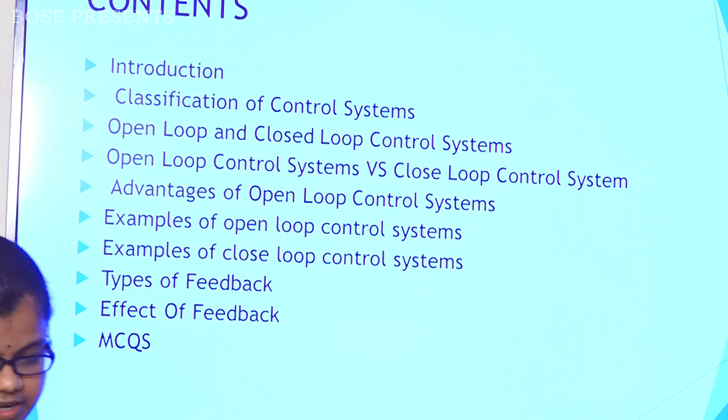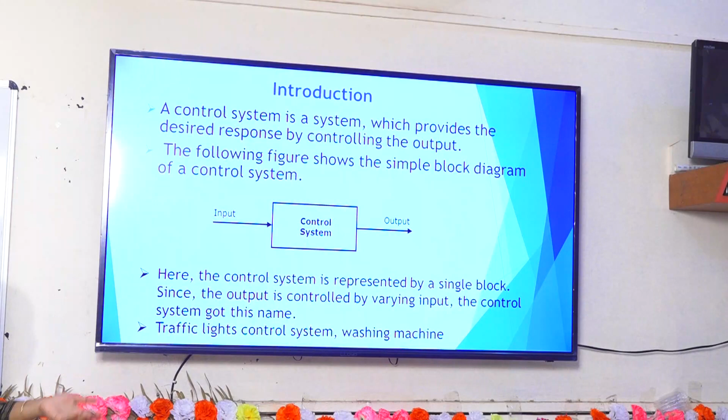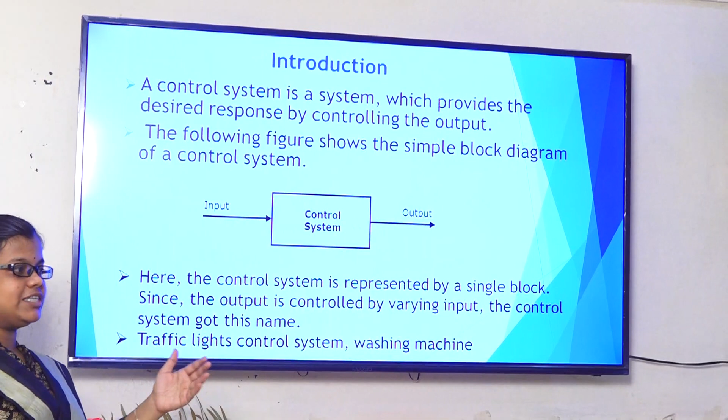This is my slide, and I will discuss what is a control system. The control system is a system in which we can get the desired output by controlling the output, that means what output we need. In a normal system we get normal output, but in a control system we get the desired response by controlling the output.

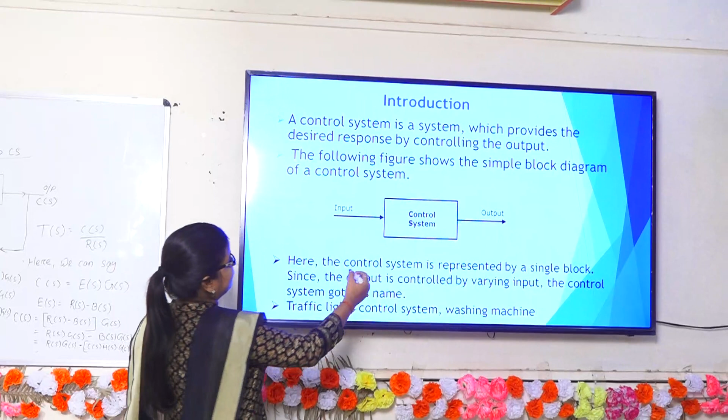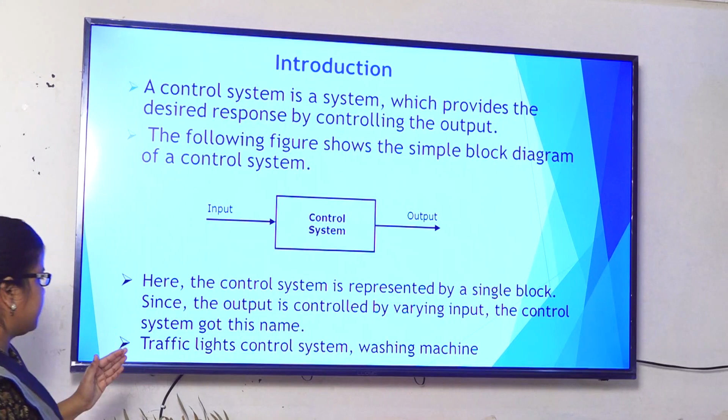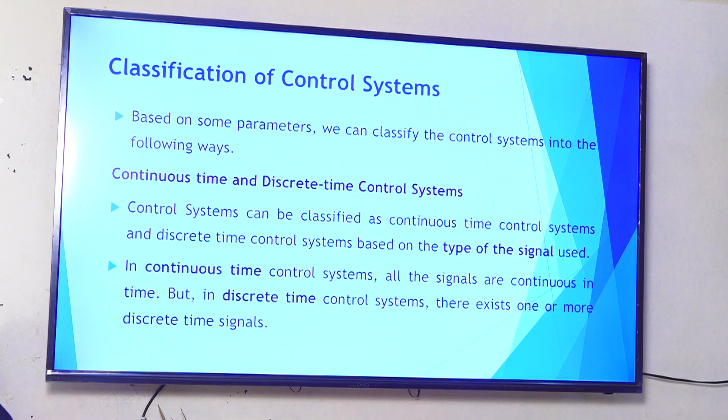This is the basic block diagram of control system, in which we can give input and get desired output. Here the control system is represented by a single block, in which we give input and get output. One of the best examples of control system is the traffic light control system and washing machine, and lots of examples are there. Then I want to say the classification of control system.

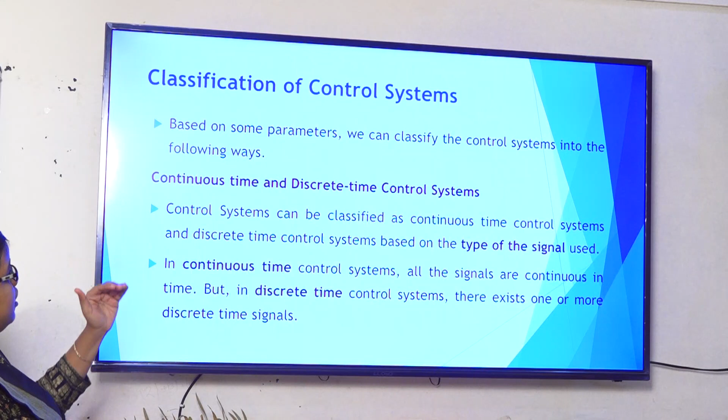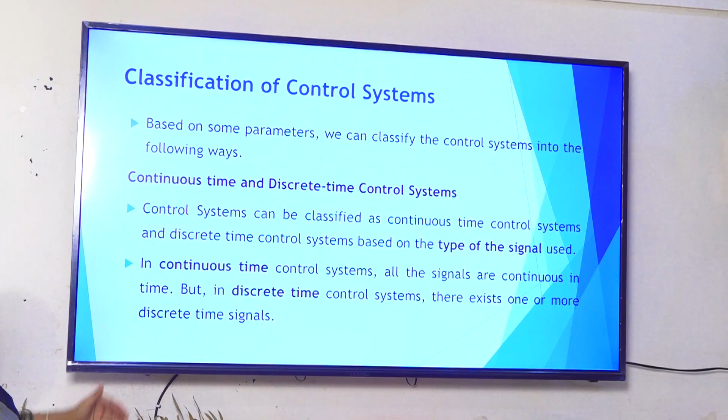Control system is classified in different ways. First of all, based on the signal, control system is of two types: continuous time and discrete time. As the name suggests, in continuous time control system, the signal is continuous with time. That means this is a continuous signal.

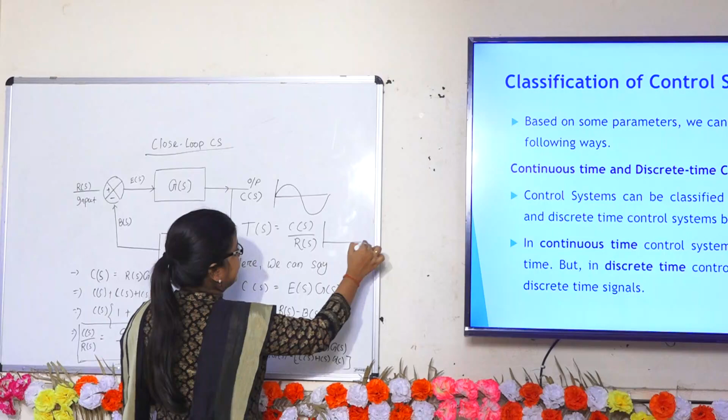But in discrete time control system, there exists one or more discrete time signals. We can say discrete time signal means this one, in which amplitude is not continuous.

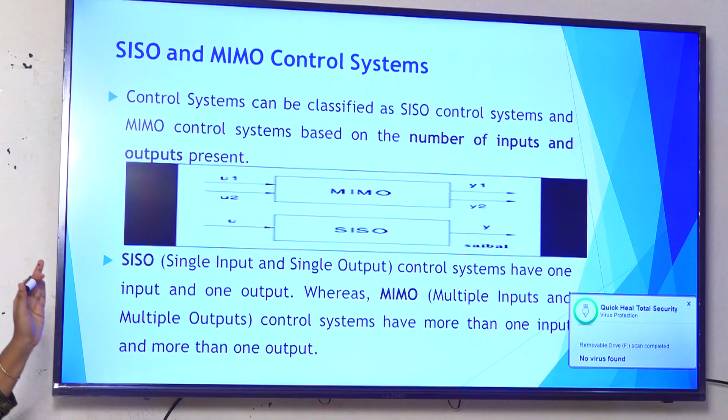Then according to number of input and output, control system is of two types: SISO and MIMO. SISO means single input single output. MIMO means multi input multi output. Here you can see this is a MIMO system, where number of input means two inputs are there, and here two outputs are there. But in SISO, that is single input and single output, here single input and single output.

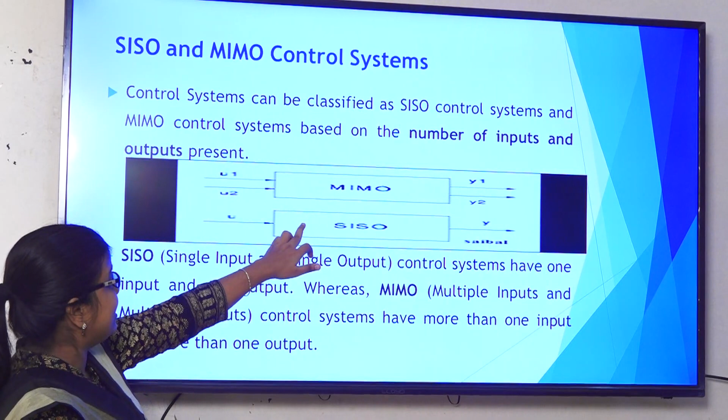But my main topic, I want to concentrate on open loop and closed loop control system. Open loop and closed loop control system are defined by the feedback path. In open loop control system, output is not fed back to the input, so the control action is independent of the desired output.

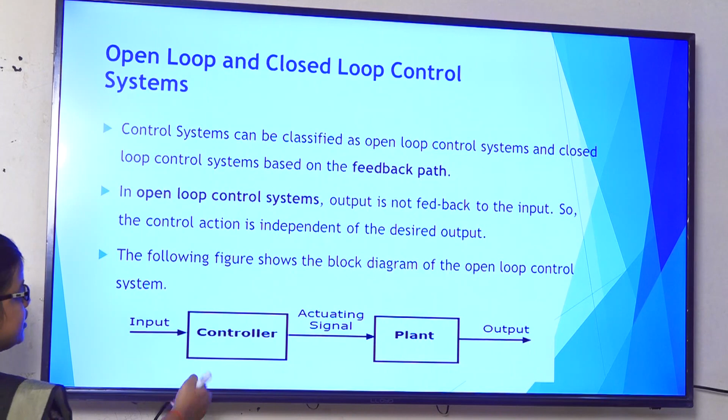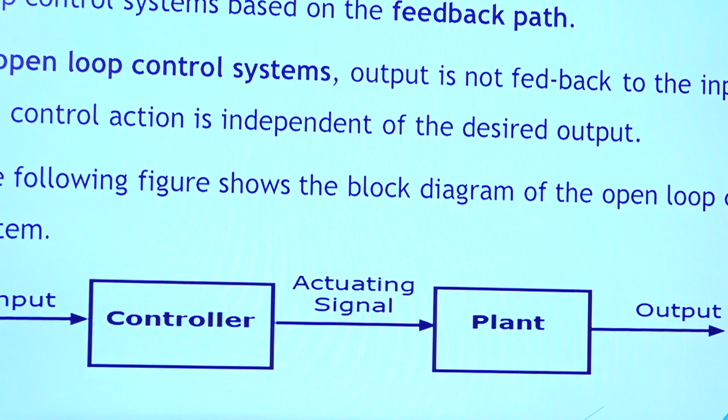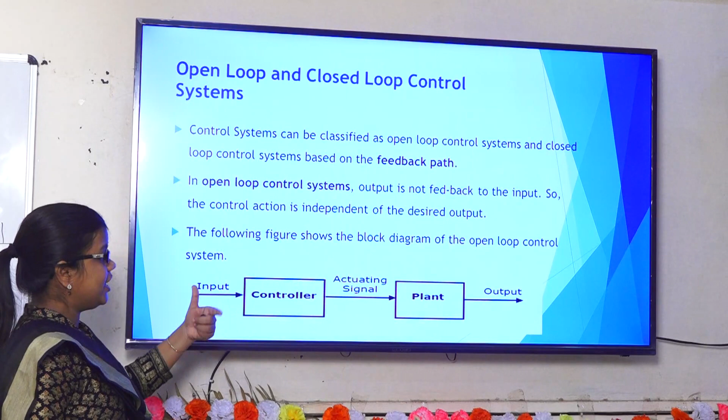The following figure shows the block diagram of open loop control system. Here this is a controller and this is a plant. I can give an example, that is electric fan. In electric fan, this is an open loop control system, because the controller, that means regulator, when we give input once, then we get desired output according to time.

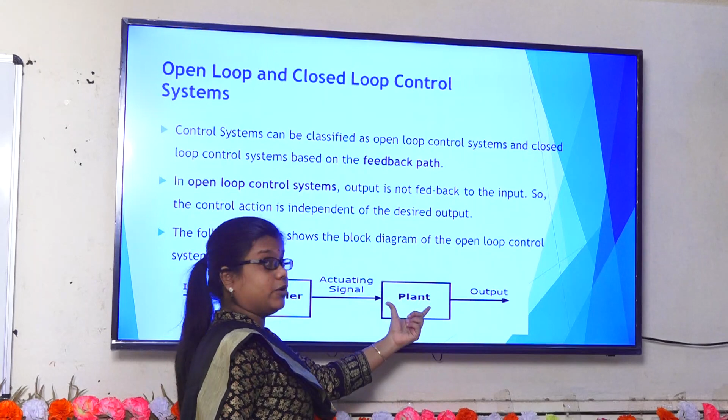In this case, regulator is used as controller, and the motor of the fan is used as the process plant. According to the regulator, we get the desired output throughout the process. So in this case, control action is independent of the desired output. What we give as input, we get output accordingly.

Then closed loop control system. This is one of the most important parts in control system. We can say that by using a closed loop control system, the system becomes an intelligent system or automatic system.

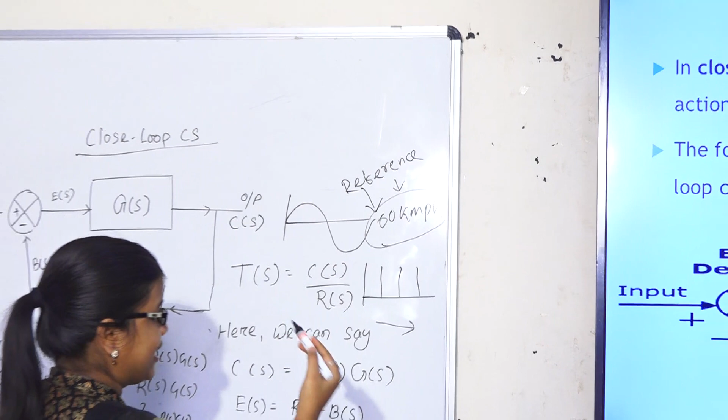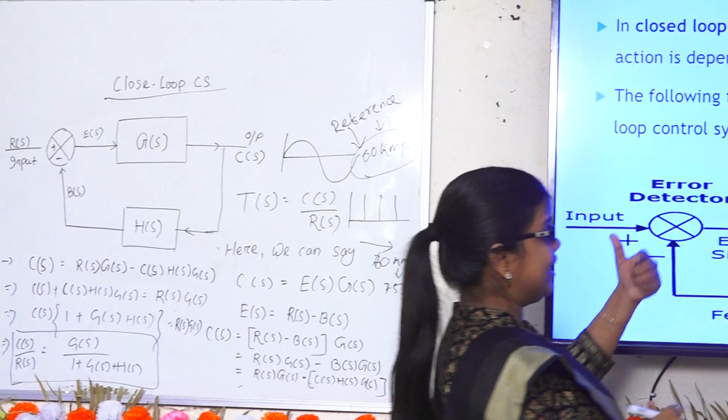Deaccelerate the bike. Then we get the desired output, that is 60 km.

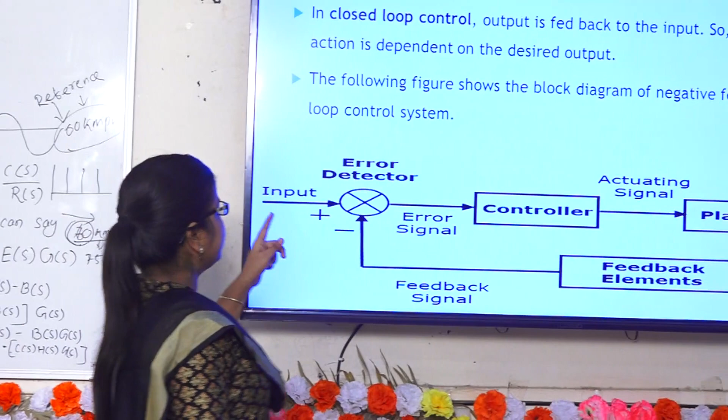We can say that if we give the input of 10 volts, we have to get the output of 10 volts. But if we get the output of 9.9 or 9.8, then the feedback element senses or measures that output and feeds it back to the input. In this case, there is an input signal and there is a feedback signal.

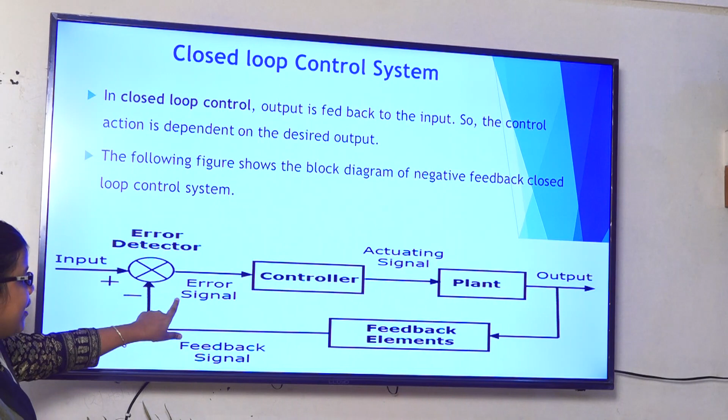Error detector compares with the reference input. Here the reference input is, let's say, 10 volts, but we get 9.5. So there is an error of 0.5 volts. Then the controller sends the actuating signal to the plant or process to correct the factor or vary the parameter.

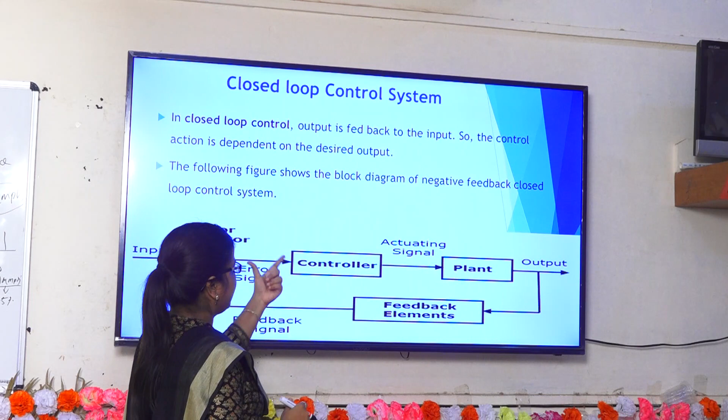Then we get another output that may be 10 volt or 9.9 volt. The feedback element again sends the output as feedback to the summing amplifier or error detector. Then the error detector again determines the error and sends it to the controller, which sends the actuating signal to rectify it. After some time, we get the desired output.

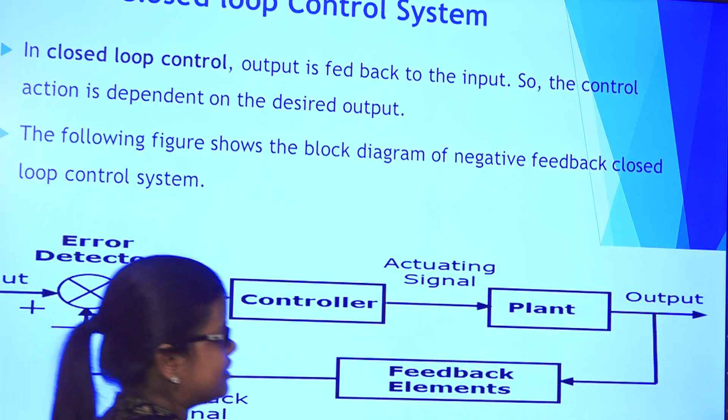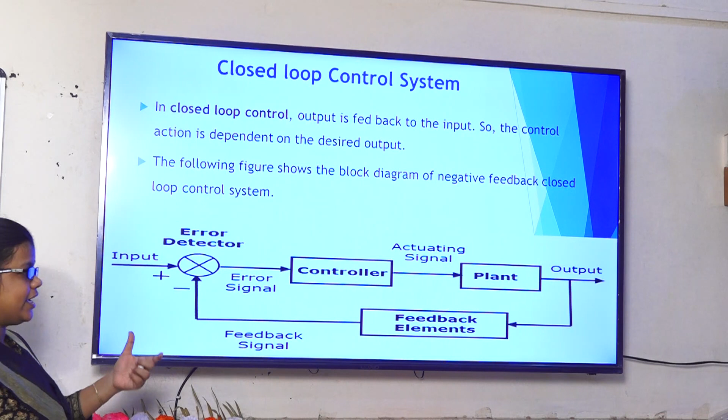The best example of a closed loop control system is our air conditioner. In a closed loop control system we get the desired output, but the output is measured again and again. For example, in an air conditioner we set the value to 24 degrees centigrade, but our actual room temperature is 30 degrees centigrade. Then the processor will...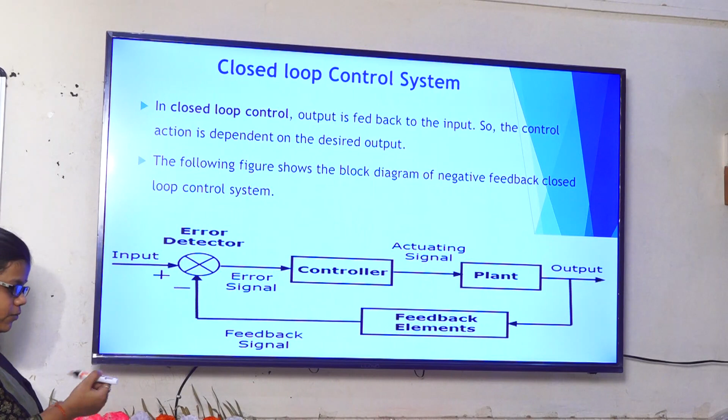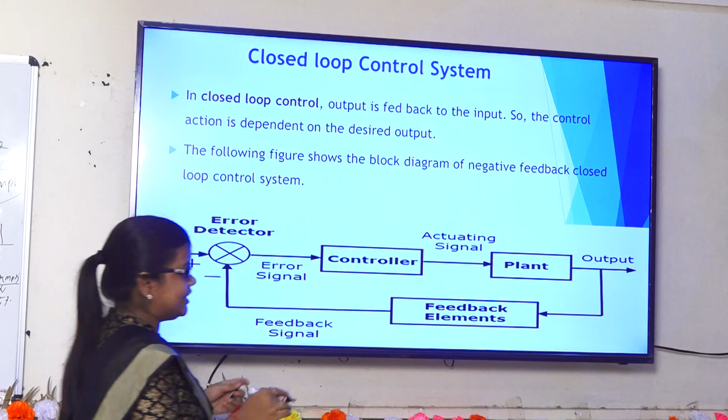...decrease the temperature so that the room temperature will be 24 degrees centigrade, and that's why the air conditioner is known as an automatic control system. Nowadays, normally automatic air conditioners are used in which closed loop systems are used.

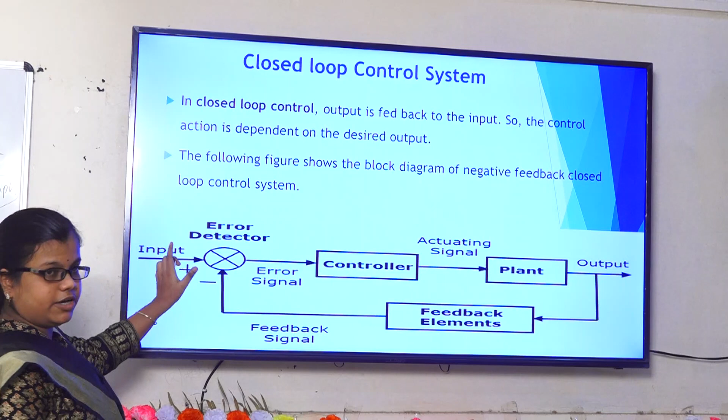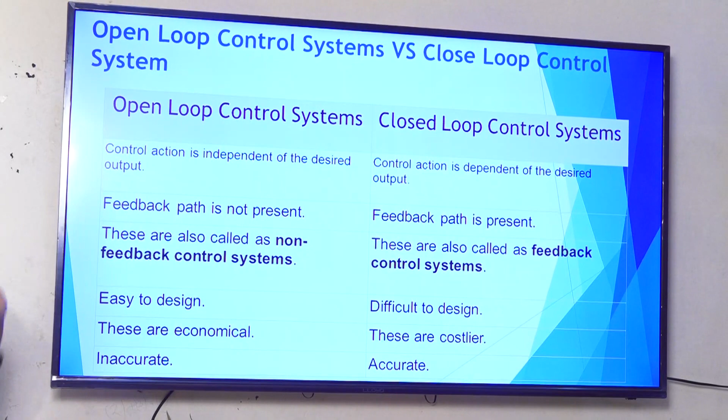Next, open loop. There is a difference between open loop control system and closed loop control system. We already discussed that control action is independent of the desired output in case of open loop control system, but control action is dependent on the desired output in closed loop. Feedback path is not present in open loop, as already said, and feedback path is present in case of closed loop control system.

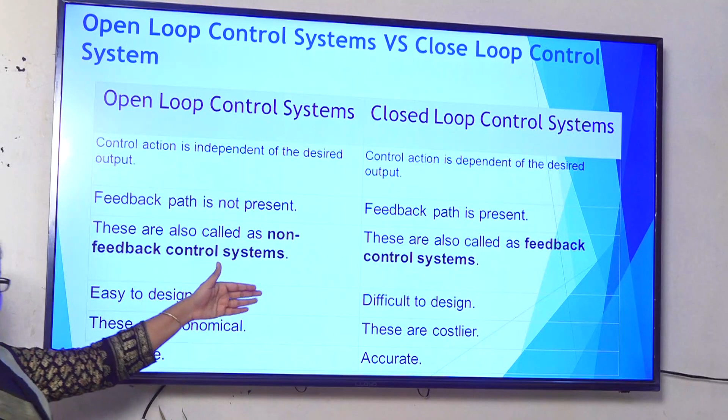So these are also known as non-feedback control systems, and closed loop is known as feedback control system. Open loop is easy to design, while closed loop is difficult to design because of the feedback element. Open loop systems are economical while closed loop are costlier. Because of the feedback element, closed loop is costlier, and open loop is inaccurate while closed loop is accurate.

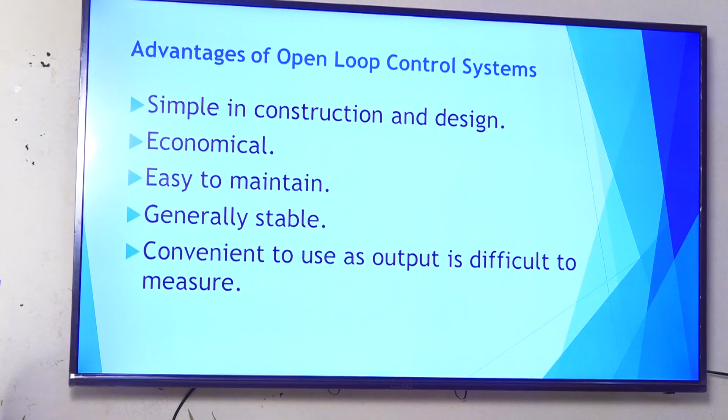Advantages of open loop control system: simple in construction and design, economical, easy to maintain, generally stable, and convenient to use, as output is difficult to measure.

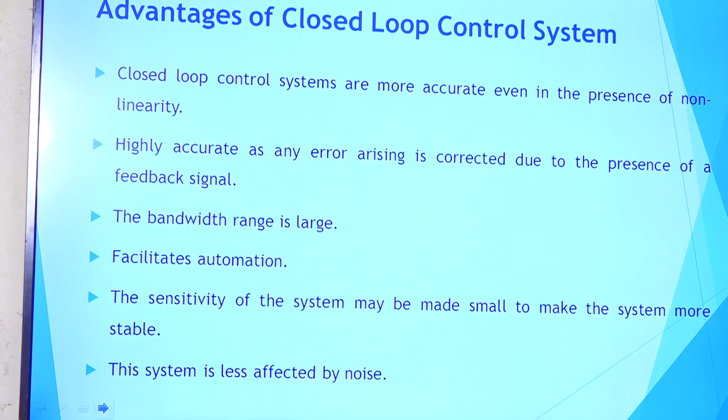Advantages of closed loop control system: closed loop control systems are more accurate even in the presence of non-linearity. In presence of non-linearity, it gives an accurate value because of the feedback. It is highly accurate, as any error arising is corrected due to the presence of the feedback signal.

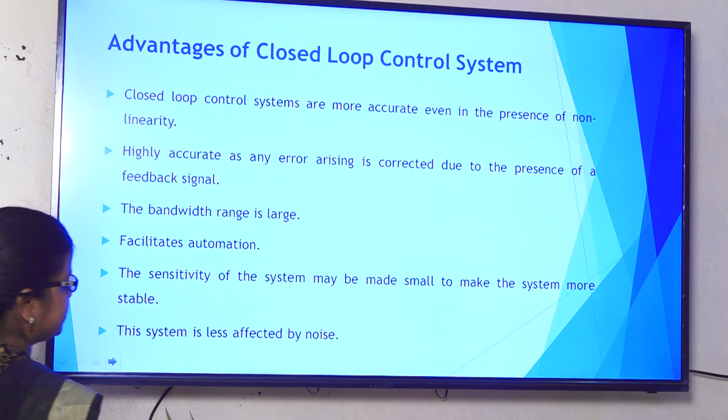The bandwidth range is large and it facilitates automation. Already I said that the closed loop system is an automatic system. The sensitivity of the system may be made small to make the system more stable. That means we change the input by a little amount, then we can see the error. The system is also less affected by noise.

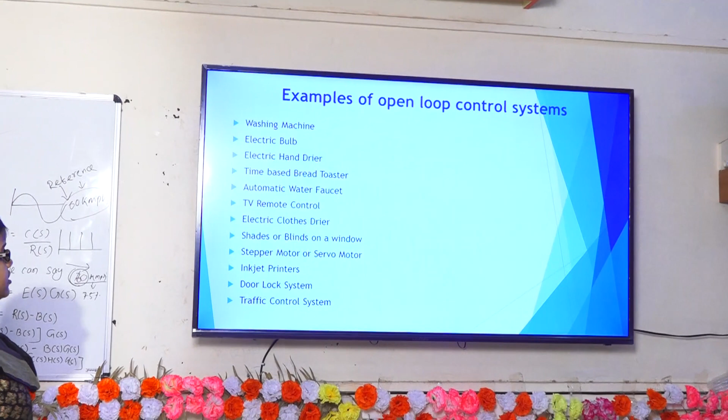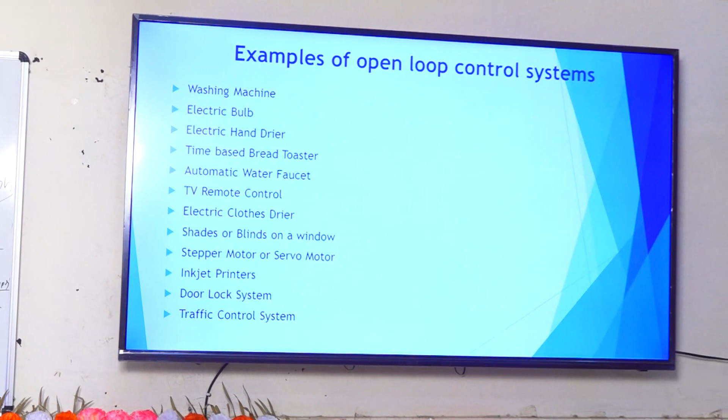These are the examples of open loop control system: washing machine, electric bulb, electric hand dryer, door lock system, traffic control, and stepper motor. In this case, input is measured and output is measured once, but in closed loop control system output is measured again and again.

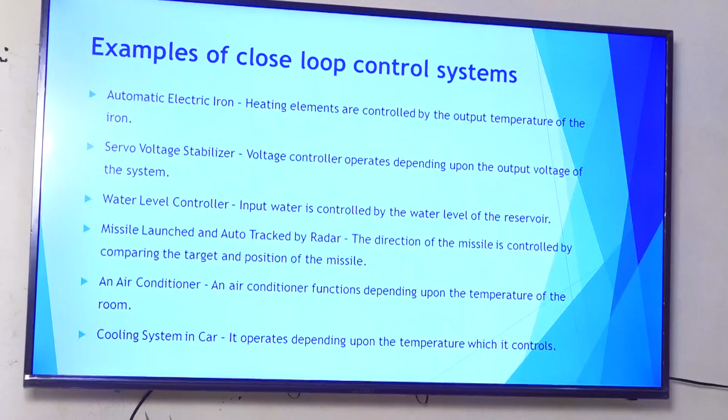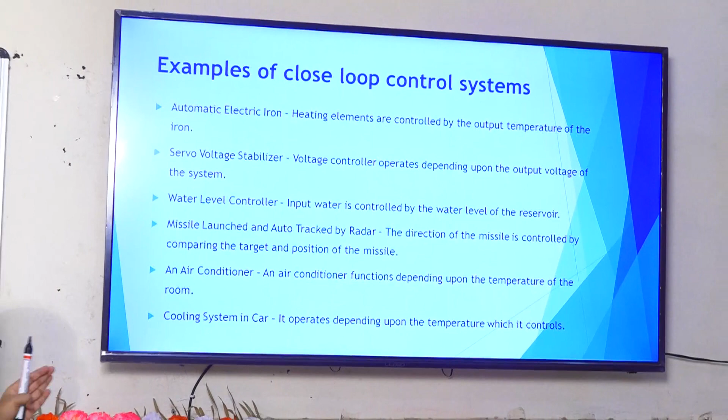Air conditioner, cooling system in car. These are automatic systems, or closed loop control systems, in which output is measured again and again.

We already said that in closed loop control system we need feedback, but we have to know the types of feedback, and there are two types: one is positive feedback and another is negative feedback.

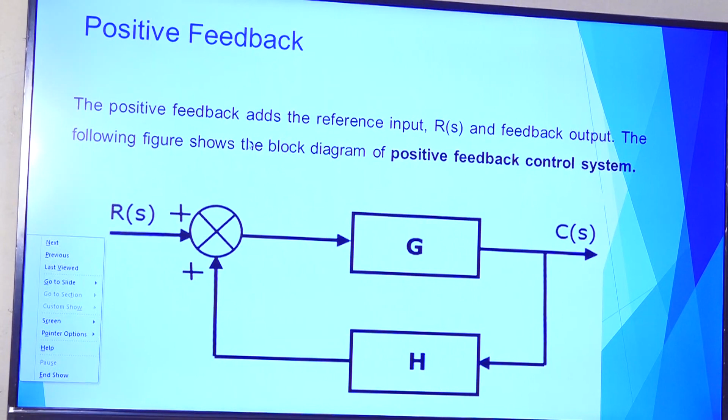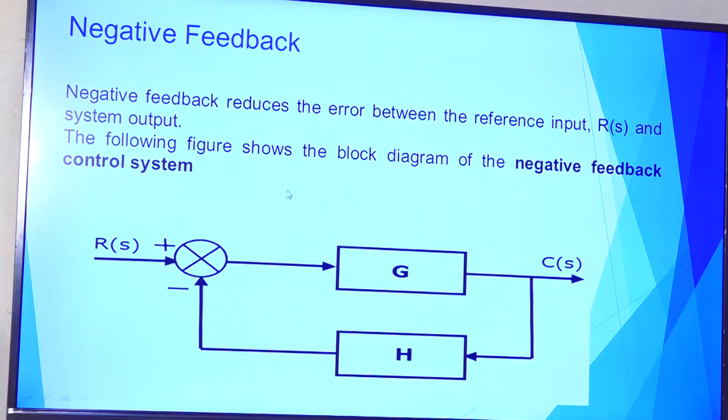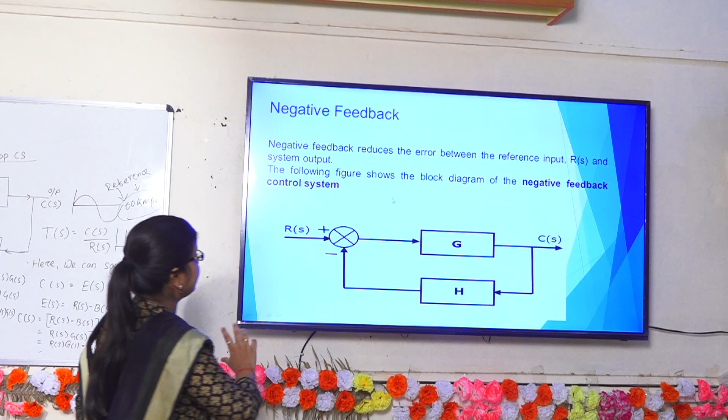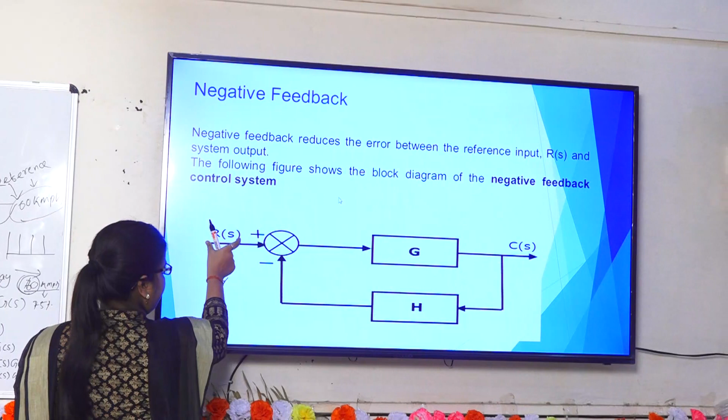The system becomes unstable, so generally we are using negative feedback to make the system stable. For stability purposes we use the negative feedback control system, and this is the closed loop negative feedback control system. Here is the process or plant, and this is the feedback element, this is the reference input, and this is the output.

In this negative feedback system we have to find the transfer function. According to the transfer function we can determine the total gain of the system. So what is transfer function? Transfer function is the Laplace transform of output by Laplace transform of input.

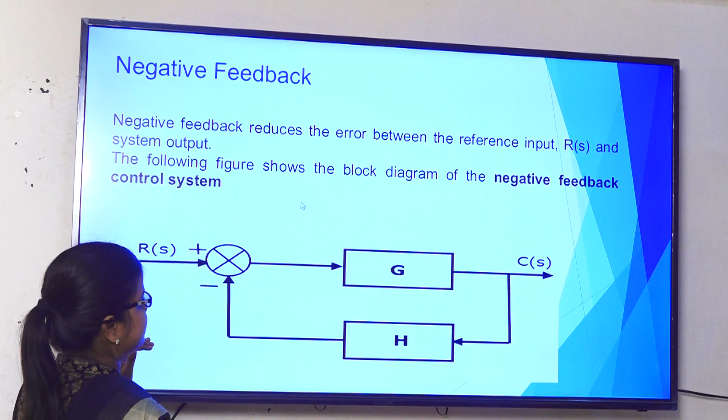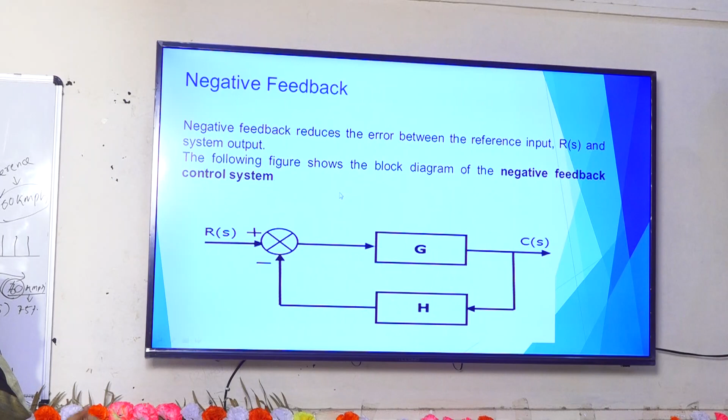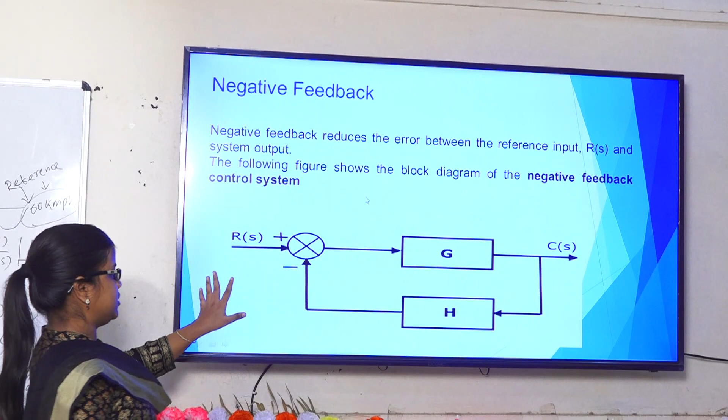In this case, transfer function is equal to C of S, that is output, and input is R of S. So transfer function will be C of S by R of S. We have to determine the transfer function of a negative feedback control system, because it is very important for control system. So now we calculate the transfer function.

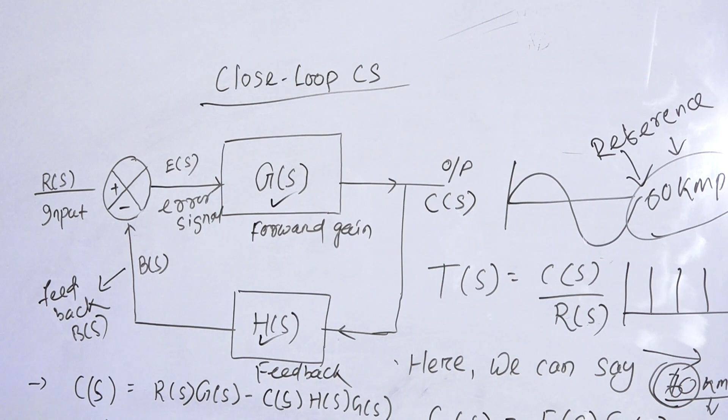Let's see. This is a system with G of S and H of S. This is the forward path, forward gain, and this is feedback gain, and this is the error signal, and this is the feedback signal, B of S. Here negative feedback is used.

So the error signal will be R of S minus B of S, because here R of S is positive but B of S is negative. So E of S is equal to R of S minus B of S. Again, we know that transfer function is equal to C of S by R of S.

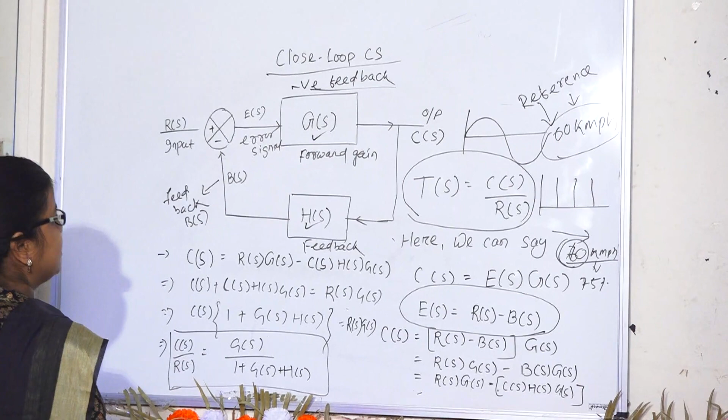So we can put the value here. C of S is equal to, in this diagram, the multiplication of this one and this one. So C of S is equal to E of S into G of S. Already we said that E of S is equal to R of S minus B of S.

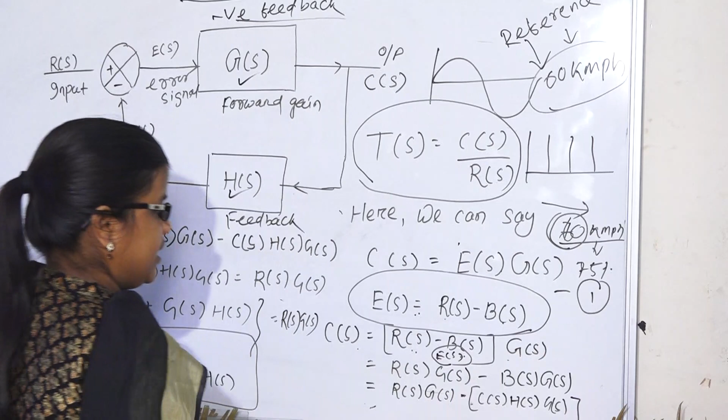So we can put this value in this equation. R of S minus B of S is E of S. This one is E of S into G of S. Then R of S into G of S minus B of S into G of S. We just multiply this term, and C of S, again B of S.

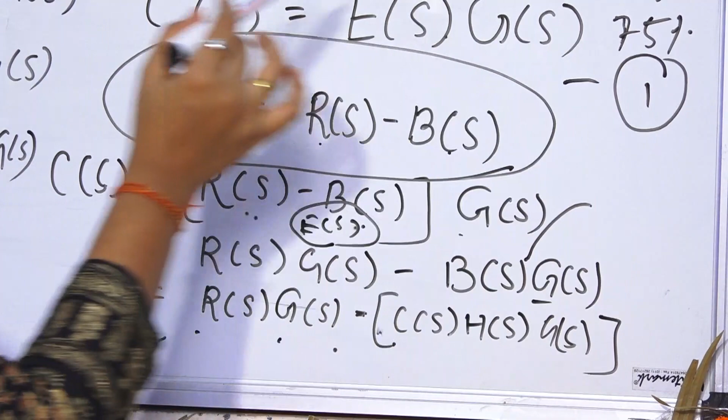B of S is equal to C of S into H of S. So B of S is equal to C of S into H of S and G of S. So C of S is equal to this one.

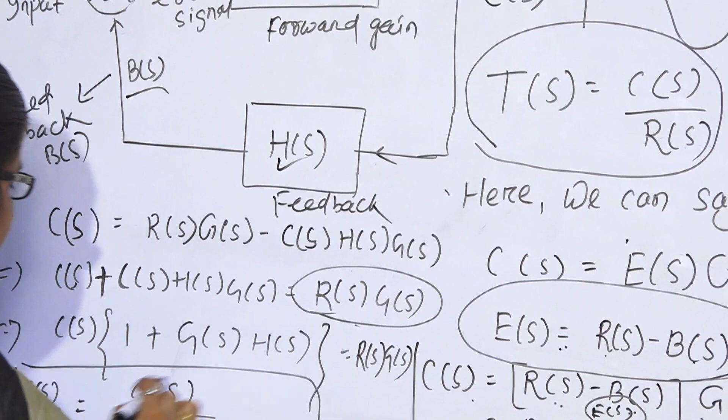We have to solve it, and take it to this side. Then C of S plus C of S H of S into G of S is equal to R of S into G of S. Then we have to take common C of S. Then we get 1 plus G of S H of S is equal to... then C of S by R of S is equal to G of S by 1 plus G of S H of S.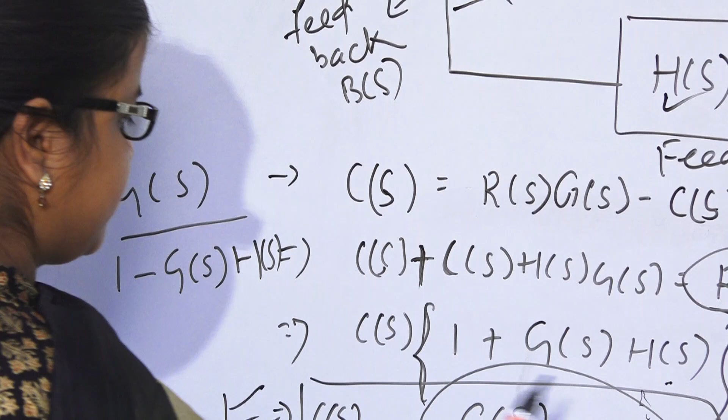H of S. That is the closed loop gain of the control system in which negative feedback is used. If we use positive feedback, then the transfer function will be G of S by 1 minus G of S into H of S. This is the transfer function for negative feedback, and this is for positive feedback.

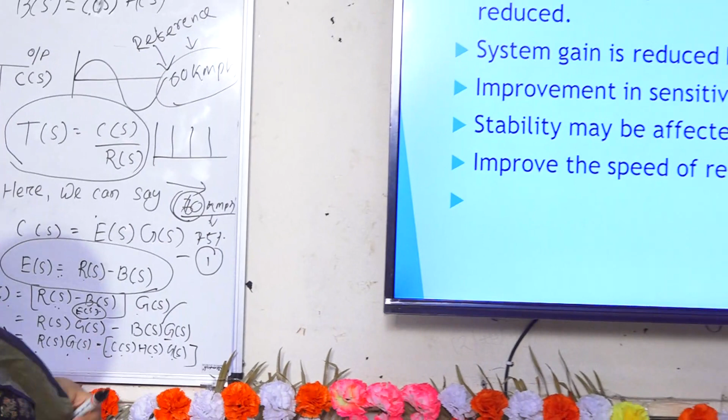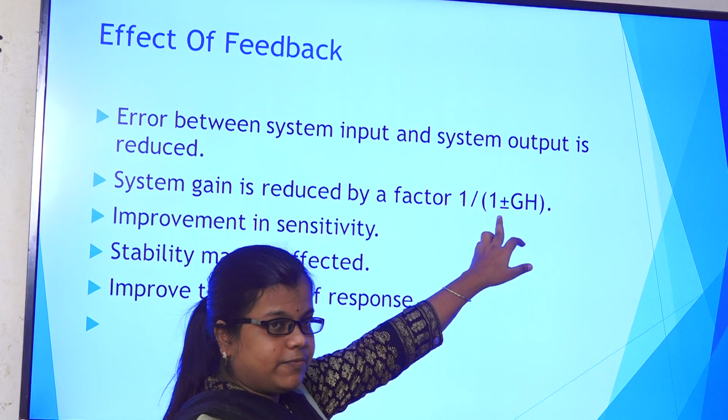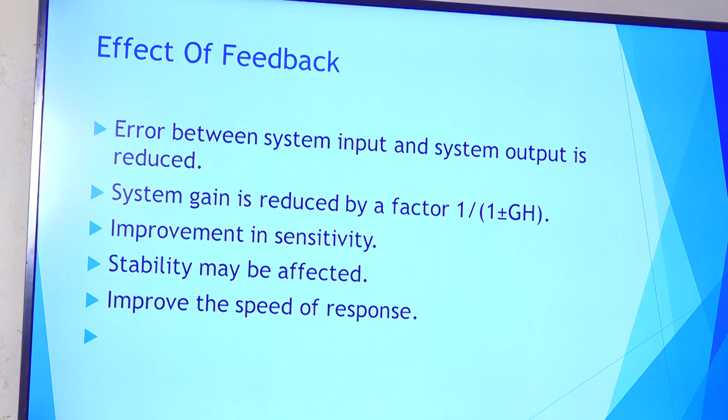Effect of feedback. What are the effects of feedback? Error between the input and system output is reduced. System gain is reduced by a factor 1 by 1 plus or minus GH. In case of negative feedback, that will be 1 plus GH, and in case of positive feedback, that will be 1 minus GH. Then there is improvement in sensitivity, stability may be affected, and it improves the speed of response.

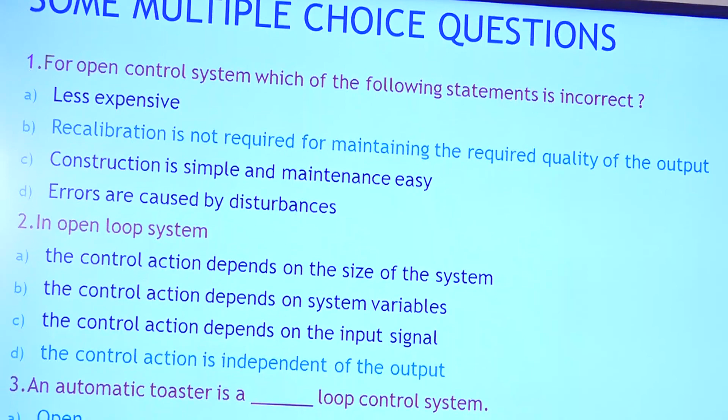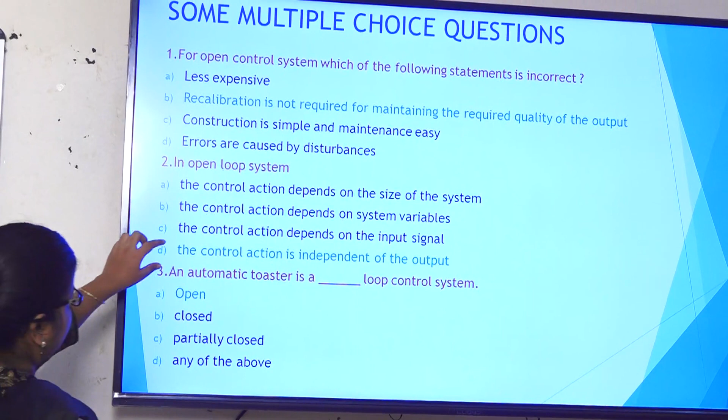And there are some MCQs for your exam. For an open loop control system, which of the following statements is incorrect? That is: less expensive, recalibration is not required for maintaining the required quality of output, construction is simple and maintenance easy, errors are caused by disturbances. The answer is B, and the ones marked in green color are the correct answer.

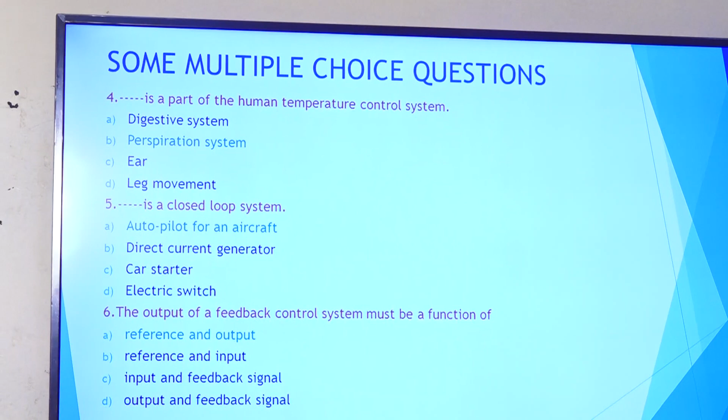These are the MCQ questions, and the answers are shown in green color.